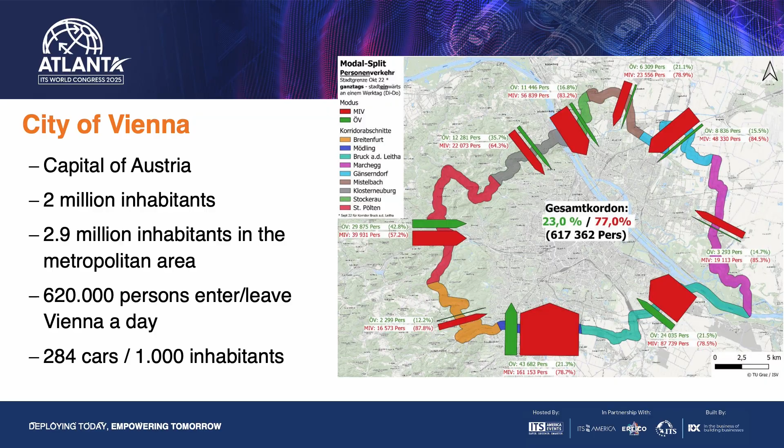Unfortunately, 77% go by car and only 23% go by public transport. So you can imagine this poses some issues for the city of Vienna. Also, the inhabitants of the city have a very low motorization rate. They only have 284 cars per 1,000 inhabitants, while the average in Austria is 484 cars per 1,000 inhabitants. So the motorization rate is very low in Vienna itself.

Therefore, in Vienna we have various strategies and plans, master plans. We have a smart climate city strategy, development plan, mobility master plan, a position paper for automated mobility, which I talked about yesterday. And these various strategies and plans lead to a very good modal split finally.

We started in 1993 with our investigations. It's the inner circle. You can see 28% pedestrians, 29% public transport, 40% by car, and only 3% by bicycle.

But this changed over the years and decades, and last year we ended up at 30% pedestrians, 34% public transport, only 25% by car, and we reached 11% bicycle share of mobility in Vienna.

How do we get to these numbers? How was our path there? The cycle share increase - one reason was the Cycle Path initiative.

It started in 2021 with our new city councillor. In the last 5 years we had up to 250 projects citywide, and we built 96 kilometers of new bicycle infrastructure over the whole city.

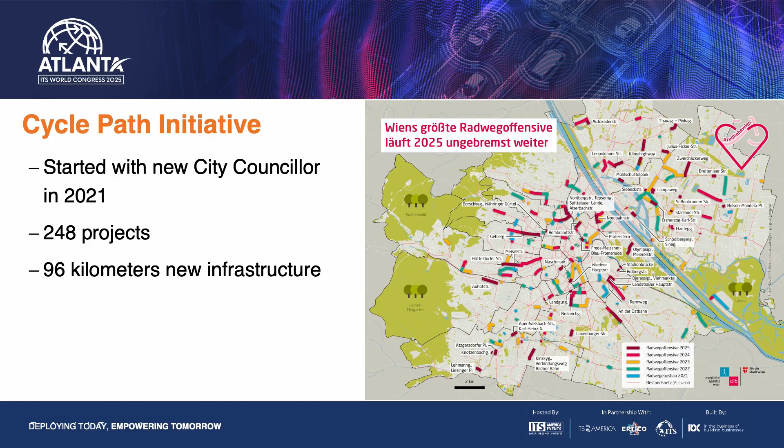The plan on the right, these colorful lines, are all this new infrastructure which is built, so you can see it's spread over the whole city and not only concentrated in the center. So we covered all this area of the city, and the main focus was on large cycle highways, one of which goes from the city center up to the northwest of the city over the river Danube.

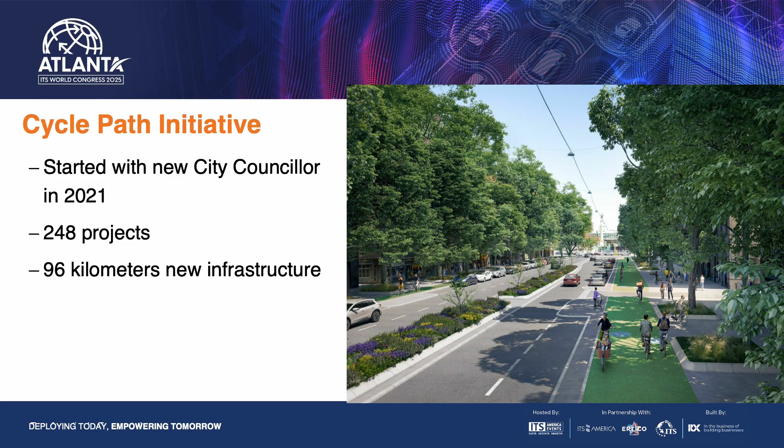This is a picture of the inner part of this cycle highway, we call it - it's Praterstraße. Therefore we reduced the lanes for cars and widened the space for cyclists, for smooth cycling in the shadow of these old trees. It's very convenient to go there.

But not only new infrastructure helps us get to this modal share, we also have to set restrictions. We set parking restrictions. In 2022 we extended our short-term parking zone, which was formerly only in inner districts, to the whole city. It's the whole city without the green areas in the Lobau on the right and Lainzer Tiergarten left side, but more or less the whole city is covered by this short-term parking zone.

From Monday to Friday, from 9 a.m. to 10 p.m., it's only allowed to park for 2 hours for guests. Only the residents of their own district can park the whole day. This costs 120 euros a year for residents, and for guests from other districts it costs €1.30 per half an hour.

With this measure we reached a reduction of 30% less public parking space on the streets, and we invested that into cycle paths, more or less - we skipped the parking lane and built a bicycle lane instead.

And the backbone of our mobility system and transportation system in the city is our public transport in Vienna. We have 29 tram lines, 500 tram vehicles, 95 bus lines, more than 400 buses, and under the surface we also have 6 underground lines.

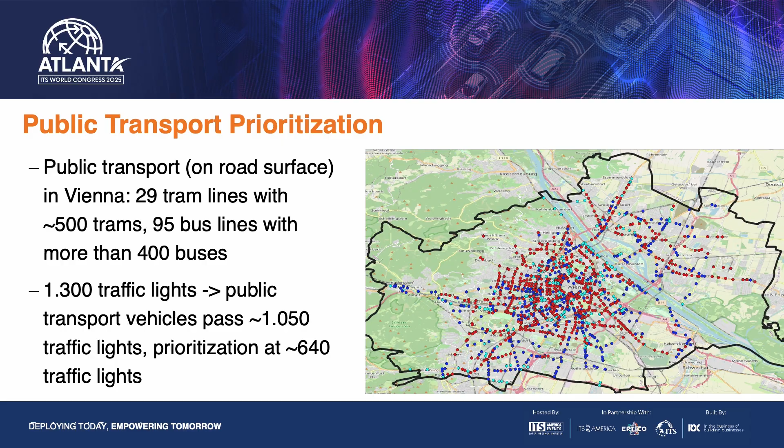And this was the starting point, one of the starting points for our C-ITS deployment. Within the European C-Roads framework, we started a few years ago, and the one use case we focus on is to update and improve the current prioritization of public transport at signalized intersections.

We see that our current technology just gives us information - a public transport vehicle is here or is not here. C-ITS gives us the opportunity to get more information out of the vehicles.

For example, is the vehicle too late? Is it too early in respect to its timetable? We can also get information on how many people are inside the vehicle, and so we can prioritize a bit more the vehicles that need prioritization. And the positive side effect - we can increase road safety and optimize traffic flow in the city with the C-ITS technology.

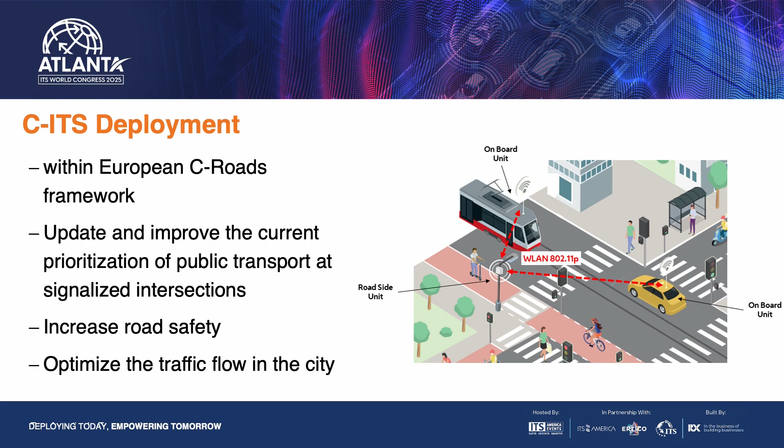We invested our own money and built 140 more roadside units up to now. We will build more in the next months and years, as roadside units are now basic in traffic lights - so when we build or modernize a traffic light, we include a roadside unit. We have 4 different traffic light suppliers in Vienna: Yunex and Swarco, and two smaller Austrian-based ones, Gesig and GPV. All of them have their own roadside units or buy them via our suppliers.

The public transport provider in Wien, the Wiener Linien, started to equip trams with onboard units. Up to now they have 6 of them: 2 from the Czech company Hermann Electronics, 2 from Kapsch, and 2 from Yunex.

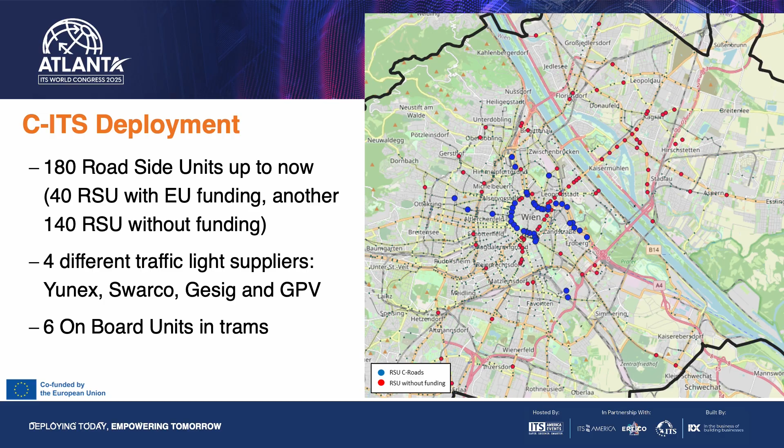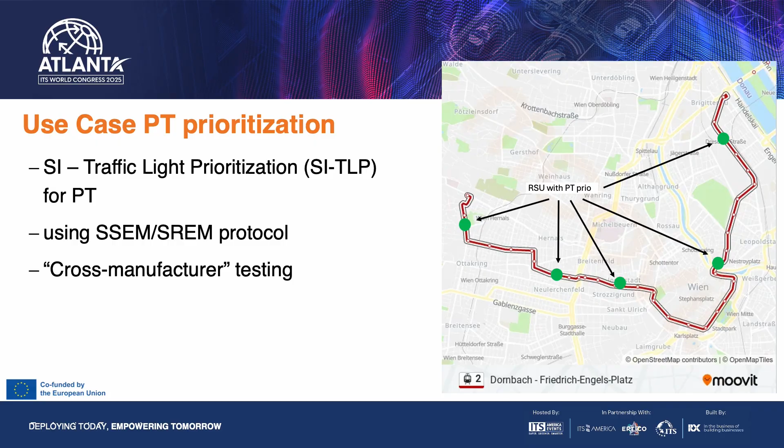We have first pilots with the use case of public transportation, using the SSEM/SREM protocol, this new protocol defined by C-Roads for public transport prioritization. We have it already out on 5 intersections over a specific tram line - we took tram line 2 in Vienna, our test tram track, and there we do cross-manufacturer testing. The onboard unit is from one manufacturer, the traffic lights are from various other manufacturers, and it works very well.

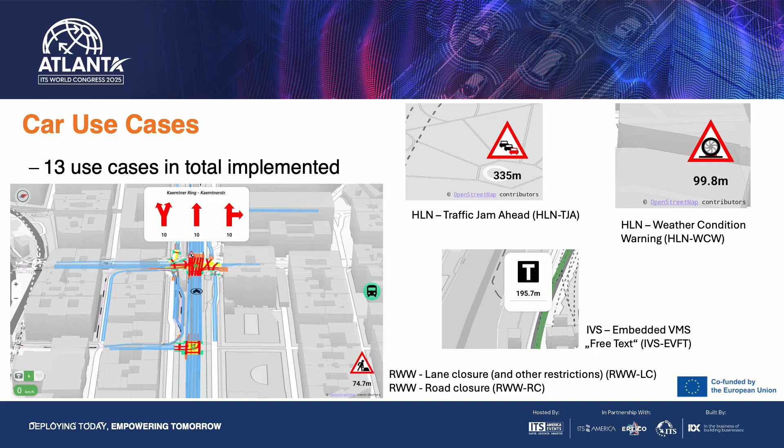Another use case we implemented was the emergency vehicle use case. The rescue service in Vienna bought a new ambulance car - a hospital on wheels, a very huge car - and they equipped it with an onboard unit and implemented the emergency vehicle use case. So when the vehicle is on the road, it sends a signal for other cars to pay attention: a blue light vehicle is coming. And if it stops to deal with a patient, it sends out the message emergency vehicle intervention.

Coming back to vulnerable road users, we also implemented the vulnerable road user protection use case. We are in contact with V2X, and we implemented 4 AwareAI detectors on a junction on the historic ring road, a very touristic area with our beautiful museums and the Hofburg. There we have 4 detectors: 2 for pedestrians and bicycles on the crossing, 1 for approaching bicycles, and 1 for approaching trams - so we have more than VRU protection, we also include the tram.

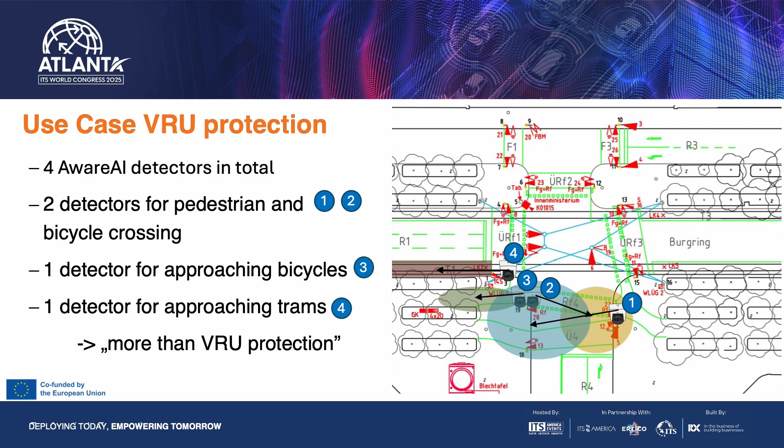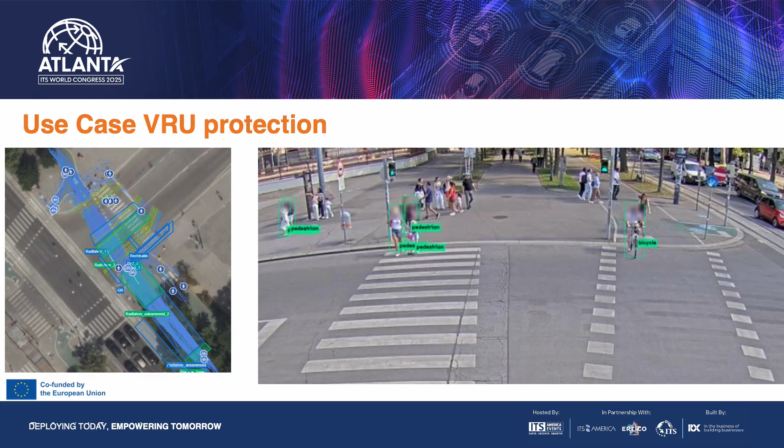It works via object recognition - it can detect if this is a pedestrian, a bicycle, a scooter, or whatever. We're also able to detect and record the trajectories. And as a side effect of this vulnerability protection, this device is also able to do traffic counting, so we also get data for our future transport and mobility planning issues in Vienna. So, one device for a wide set of options to include in the daily work of the city of Vienna.